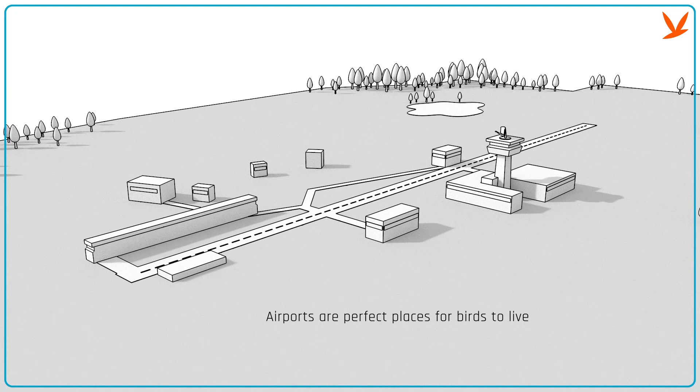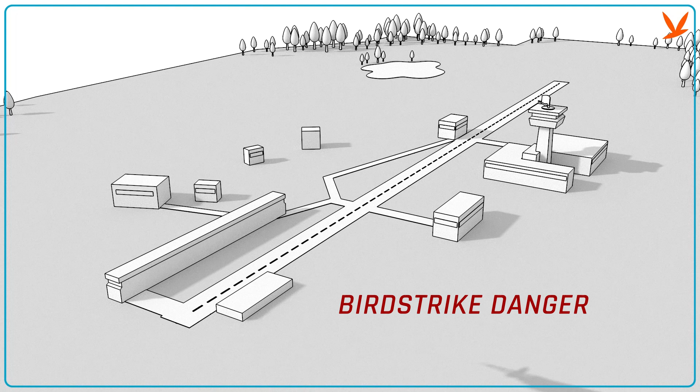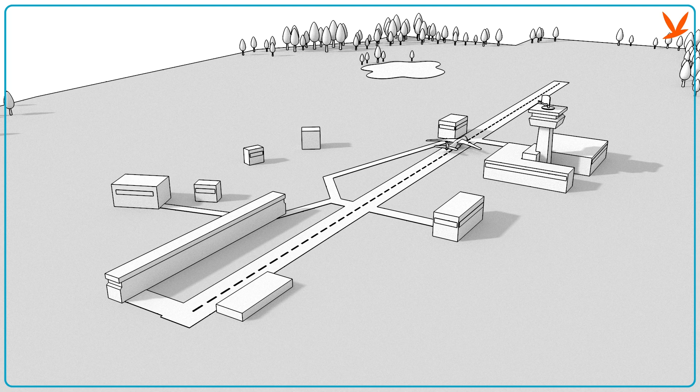Airports are the perfect environment for birds to live. However, they represent a big threat for airplanes. The bird strike, the impact between a bird and a plane, happens mostly during takeoff or landing, the riskiest flight procedures. Current monitoring systems don't provide the required answer. The number of bird strikes is still increasing, and a new dangerous threat is arising: little commercial drones used to disrupt both safety and security.

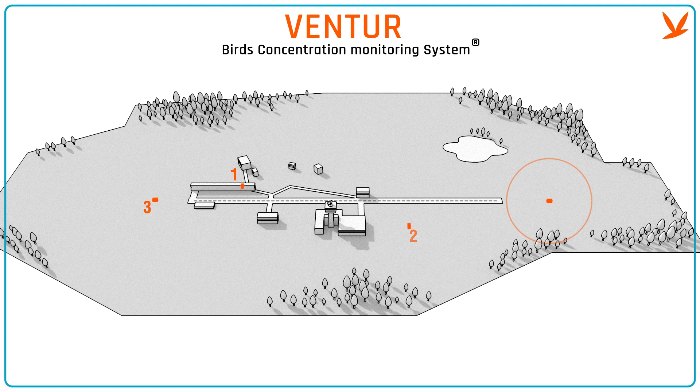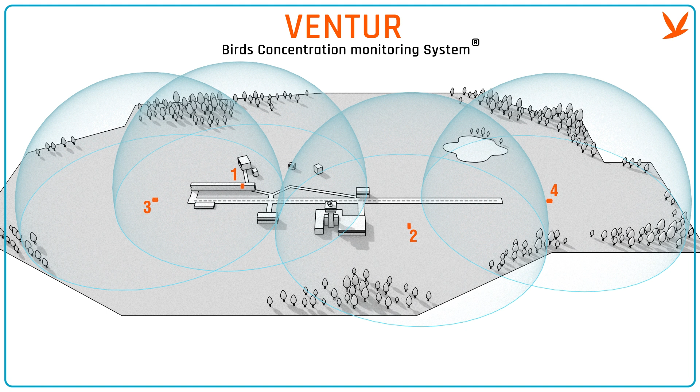Ventur is the next generation bird and drone detection system, the first system which uses artificial intelligence to detect, track, count and identify the location of birds and drones, and above all, classify bird species.

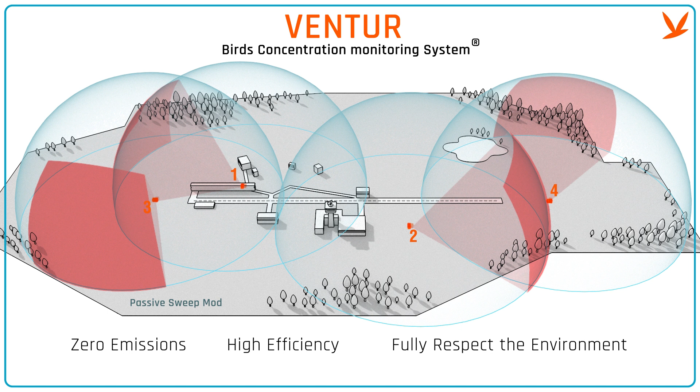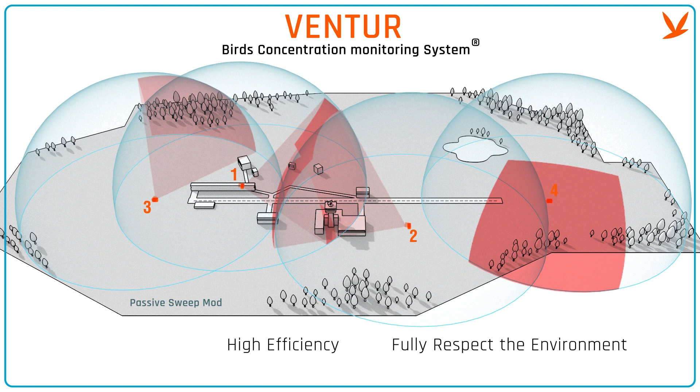Intelligent cameras equipped with our machine and deep learning algorithms constantly sweep the airport area. A combination of our algorithms and high-efficiency cameras, 5K and above, allow extreme precision and long acquisition range. When a bird is detected, a warning will be issued and an alert appears on the situational awareness display.

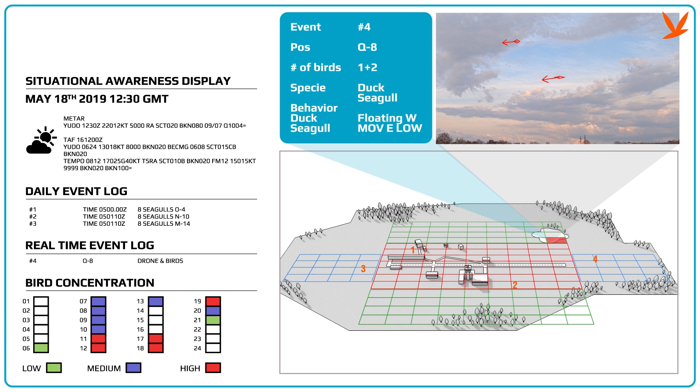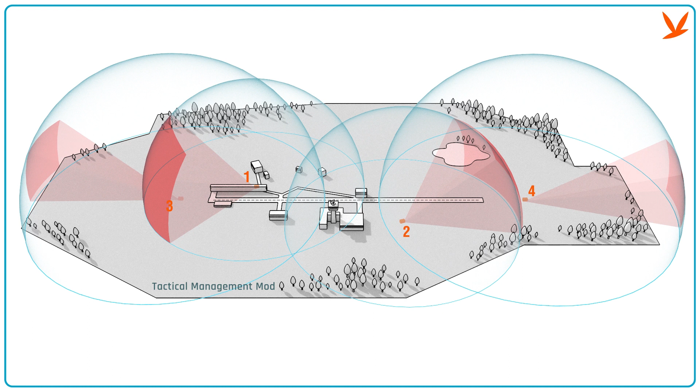While cameras 1 and 2 continue sweeping the airport area, cameras 3 and 4 will cover the final path before takeoff and landing, to provide real-time situational awareness to the pilots.

We make your flight safer.